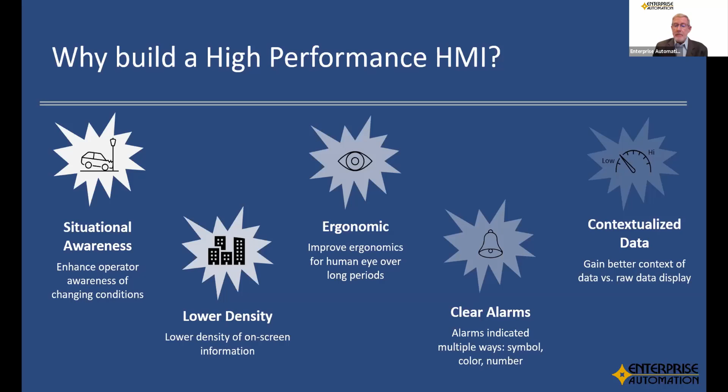So high-performance HMI is the industry answer for a standardized, easy to use, and more productive HMI graphics system. So a properly designed HMI will support very smooth, stable operation of the process, as well as notify an operator of any conditions that may be outside of what would be considered a normal condition.

Design requirements. Early HMIs really were very simple depictions of a P&ID of the process that they were either controlling and monitoring. This was mostly the limitations of the computing and graphics power at the time, but with the enhancements to that, a lot of graphic screens have become quite animated, if you will, and look more like cartoons. But that can be very distracting to an operator, especially in an abnormal or emergency condition.

So the ISA came out with ISA 101, the HMI design standard. This started back in 2003. The International Society of Automation, or ISA, commissioned a working group of end users, operators, engineers, and others to basically get together and lay the groundwork for the standard. And finally, in 2015, 12 years later, they published the ISA 101 HMI design standard. It's a set of guidelines, principles, and philosophies for developing graphics on a process HMI.

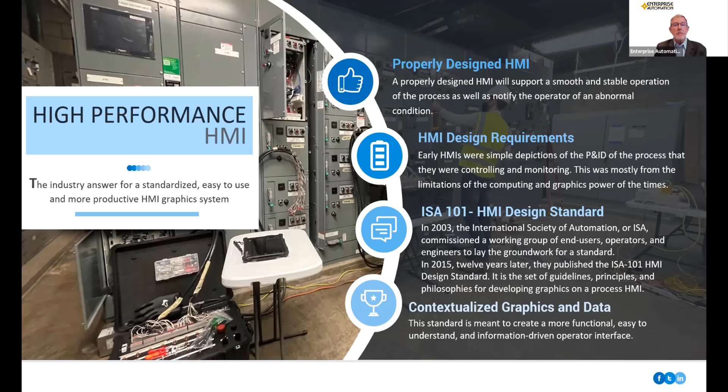So what are some of the key considerations that you need to consider when doing a high-performance HMI? Number one, proper use of color. So moving away from the intense and colorful graphics, the high-performance HMI is developed in grayscale, with color really intended to be more of an attention getter. Gone are the days of red and green to indicate whether it's running or not, on or off. In a grayscale screen, the use of color is meant to indicate an abnormal situation very quickly.

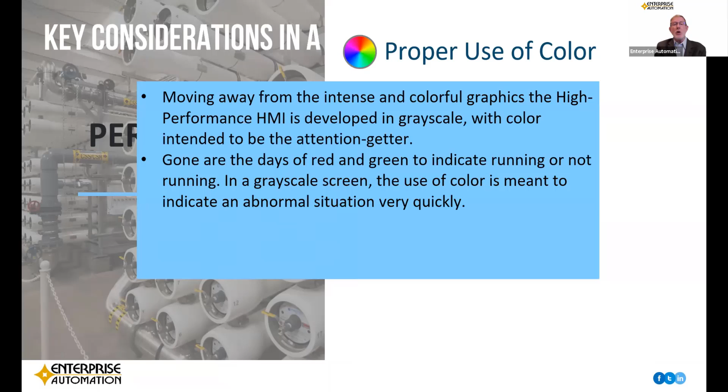Now, it has been shown that the new use of color alone has resulted in approximately 48% improvement in detecting abnormal situations before alarms occur.

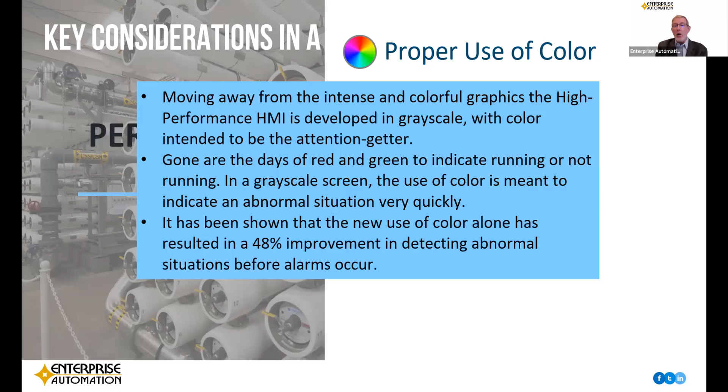Second thing to consider is, as I said earlier, information versus data. Many HMIs are going to have dozens or more of data points visible on the screen, but nothing for an operator to determine what the data means. There's no context to it. Are you approaching a high limit? Are you at a low limit? Raw data readouts, again, have little to no context to actual status.

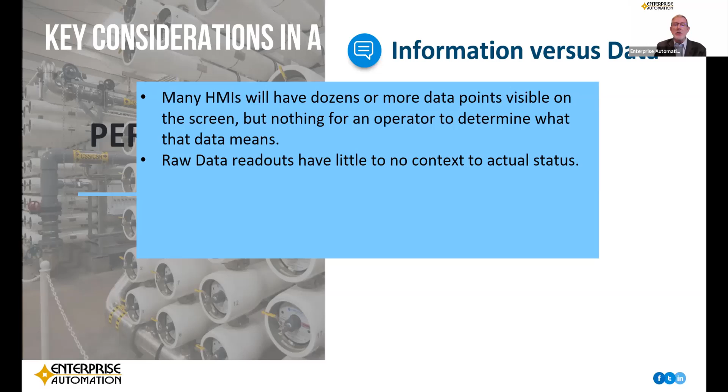By utilizing an indicator of normal range with a process variable, the operator can make a quick decision to take action to correct a situation that is trending away from what would be considered normal.

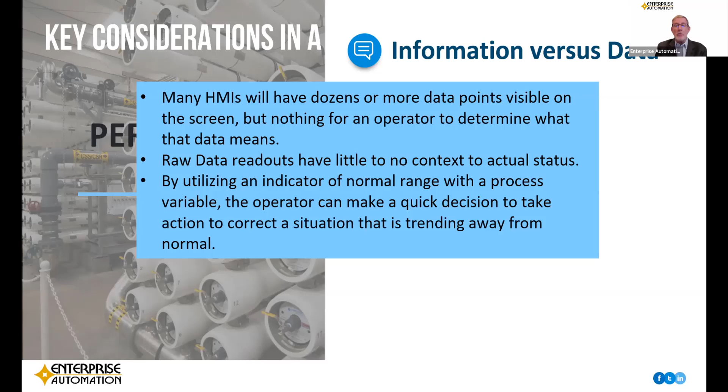Talking about embedded trend displays. Traditionally, the trend display has been a separate screen that you would have to call up to see what has been happening over a set period of time. By embedding them within the graphics of your screens, the operator will be able to see what's actually happening and what has happened while looking at the actual process in operation.

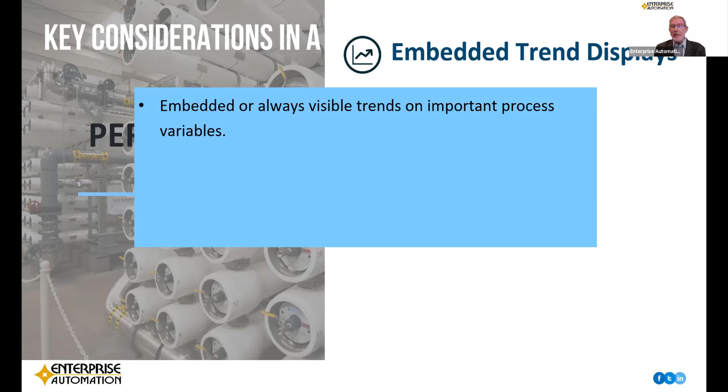So the trends are always visible. The operator's got a quick overview of historical data, can evaluate for any necessary adjustments before a situation can occur. Time-consuming and costly mistakes can now be avoided.

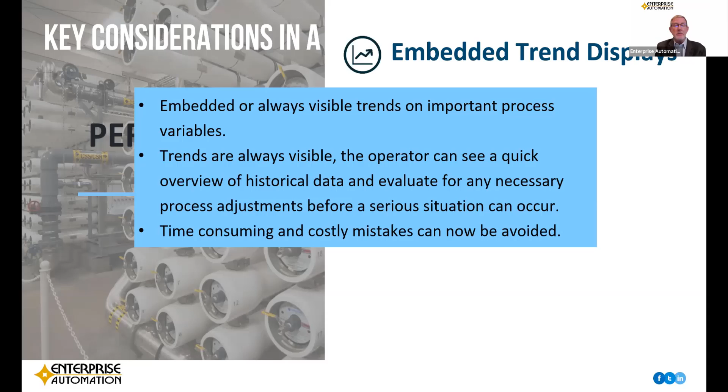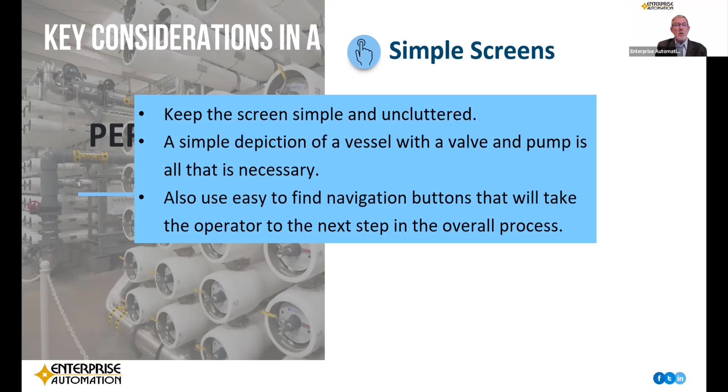Next one is simple screens. Keep it simple. Keep the screen simple and uncluttered. A simple depiction of a vessel with a valve and a pump is all that's necessary. Also use easy to find navigation buttons that will take the operator to the next step in the overall process.

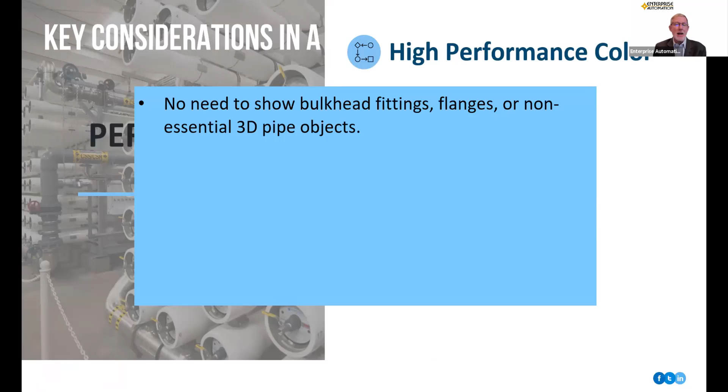And then high performance color. And I'm really not talking about applying color, it's more in the way that the screen is laid out. So there's no need to show bulkhead fittings, flanges, or non-essential 3D piping objects. They just add additional clutter to the screen. Using an ISA valve and pump symbol and using a line to depict process flow are the standard now.

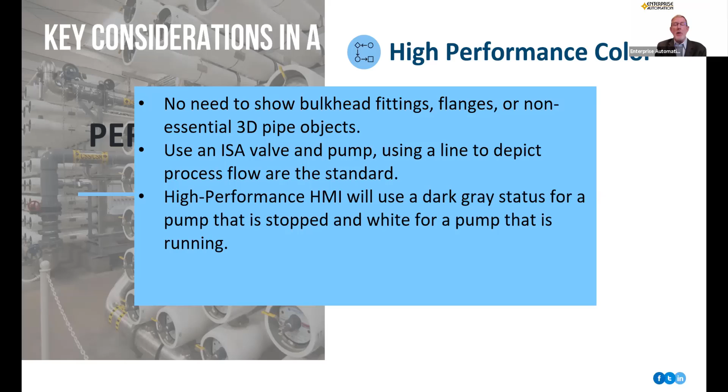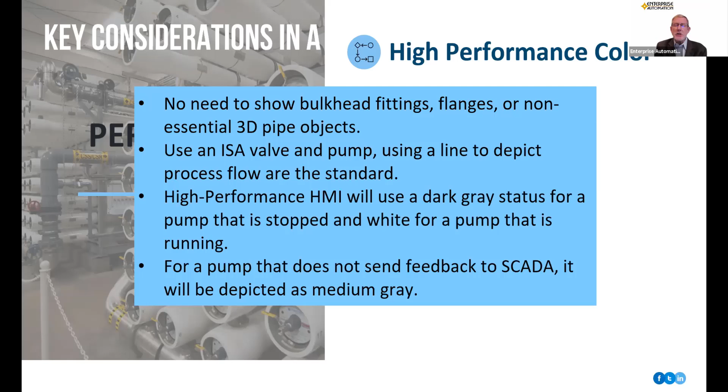High performance HMI will use dark gray status for a pump that is stopped and white for a pump that is running. Again, we're getting away from that red and green indicating running or not running. For a pump that does not send feedback to a SCADA, it will be depicted as medium gray. Now, again, these are just guidelines and suggestions for the standard.

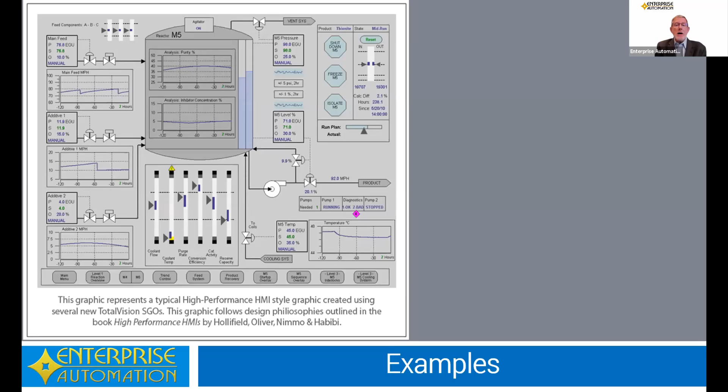So some examples. I have an example screen here utilizing grayscale color as well as data with context to status, indicating whether it's in or out of the standard operating range. Embedded trends within the actual object. As you can see, we've got a vessel here.

In a traditional HMI, the level indicators that are on the right-hand side in blue would occupy the entire vessel. It's not necessary. By embedding that trend in there, you can see historical data as well as the actual current values. And again, keeping simple screens, not the 3D clutter that we've had in the past. And high performance color to indicate an abnormal condition, generally an alarm condition.

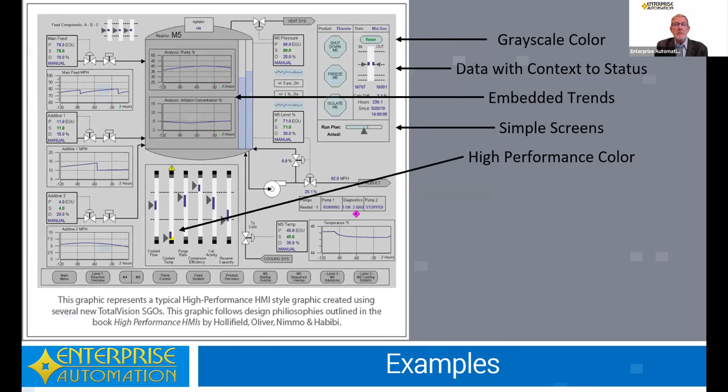So let's talk a little bit about the display hierarchy. Proper display hierarchy is critical to a high performance HMI. So there's 4 levels. Level 1 is the overall situational awareness. It's used for looking at the overall operation of what's happening in your process.

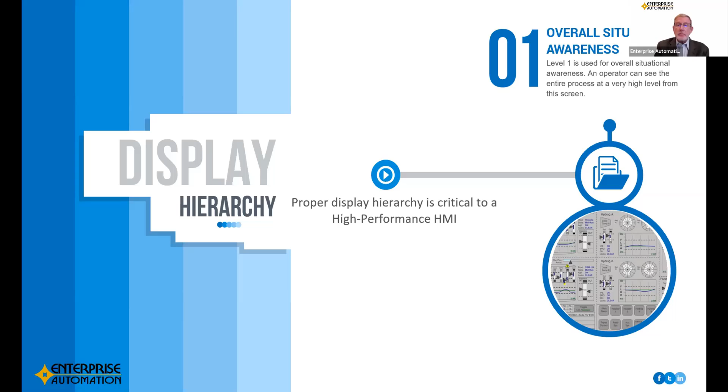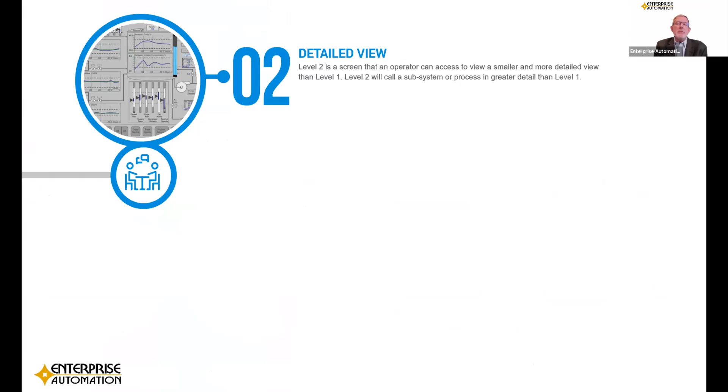Level 2 is the detailed view. It's a screen that the operator can use to access a smaller and more detailed view than the overall level 1. You could call it a subsystem or even a process in greater detail than level 1.

Level 3 is getting into the equipment details, such as a pump or a valve. It can also include more detailed data on that particular process, drilling down into it. And again, as we get into the demo, Kelvin is going to show you that level of detail.

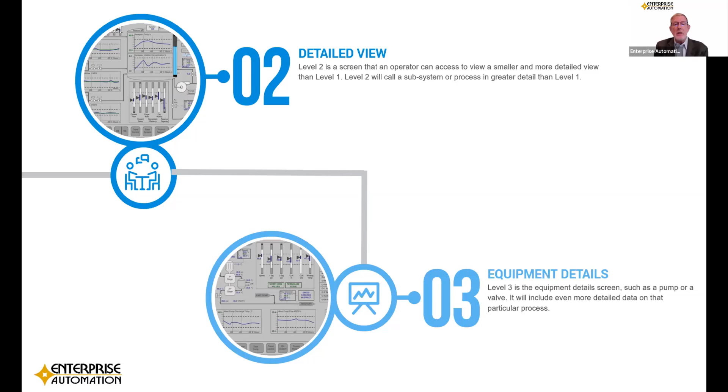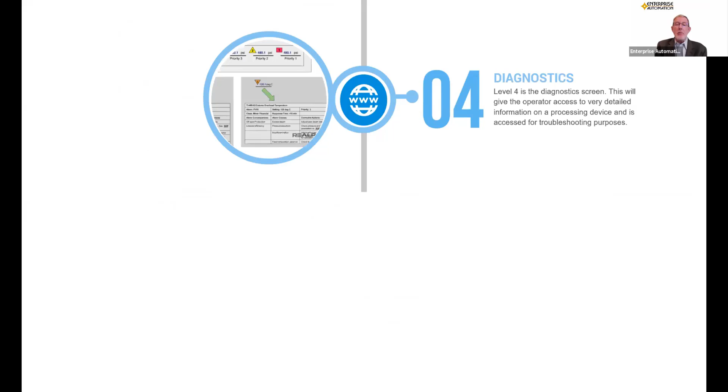And then finally, level 4, which is the diagnostic screen. This gives the operator access to very detailed information on the process and devices for troubleshooting purposes.

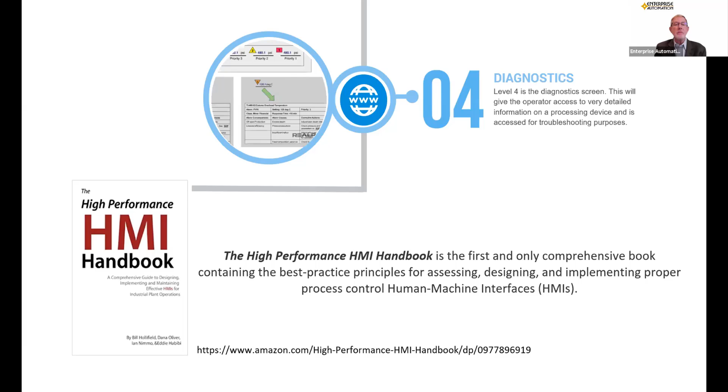Well, that's the end of the boring slides. I will turn it over to Kelvin now to do the demo. And I'm going to stop sharing my screen, Kelvin, and you can take over. Okay.

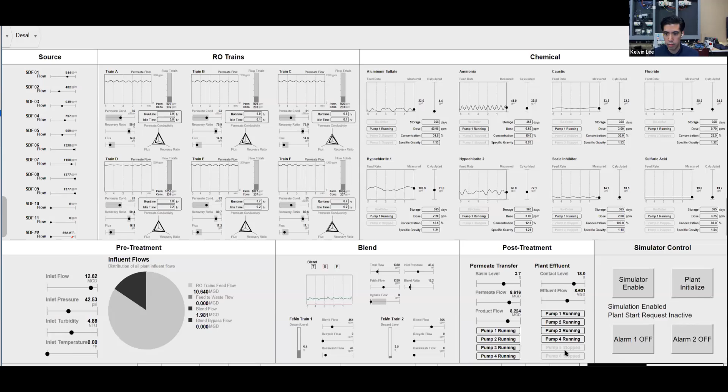So here we have our implementation of a high performance HMI with situational awareness involved. So what we see is basically no color, everything is in grayscale. We have trends for all the relevant information. We basically pick and choose what we want to show and what we don't want to show. The intent is that an operator can just look at this and see only the relevant stuff in an overview.

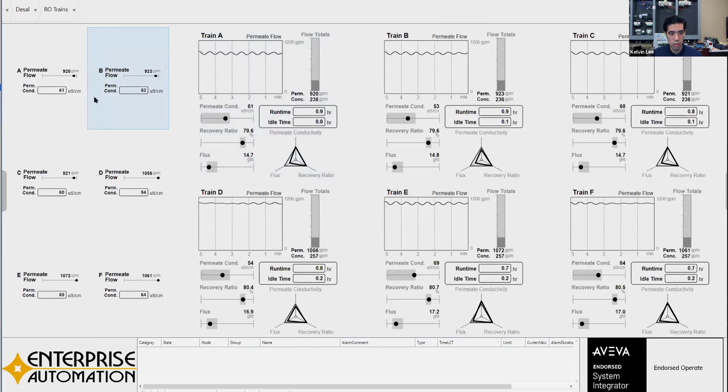Then we have multiple layers that as we drill down, we do get more information. So for the RO trains, for example, we can click into the RO trains area, and then we get just a little bit more information. And then going into each individual train here, we get additional information, a little bit more of a traditional P&ID style layout. So we have just a more traditional look and feel that operators might be used to.

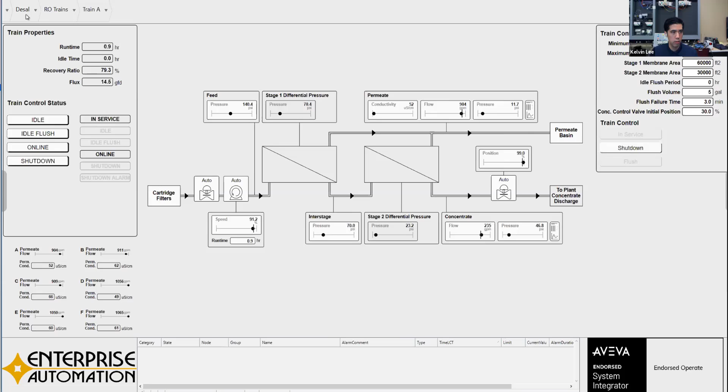But again, we notice that there is basically no color on here. Everything is simple. There is basically no question of what information you're looking for. Something else that we implement here is you can quickly, as an operator, look and see how your system is performing. So without prior knowledge of the process, you can look at the graphs here and see that, okay, I have a gray box and a black indicator.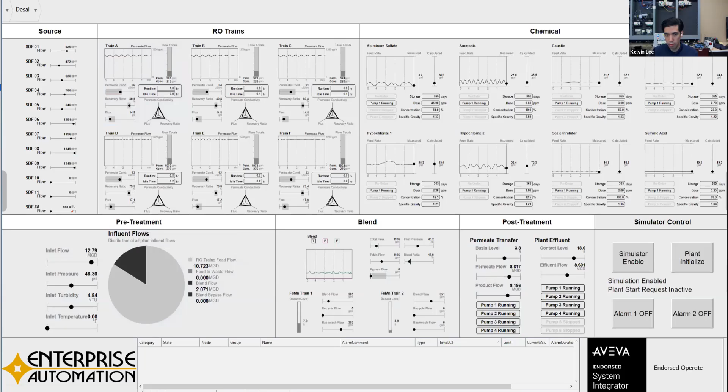So the gray box is my ideal performance area. Basically, you can map it to your set points, so your alarm set points. So if I'm within my alarm set points, that's my ideal operating range. So over here, I'm at 79% recovery ratio. Without prior knowledge of the process, I can see that, yeah, that's actually where I want it to be, because as I zoom in real quick, we see that the black dot is within that gray box, almost in the middle.

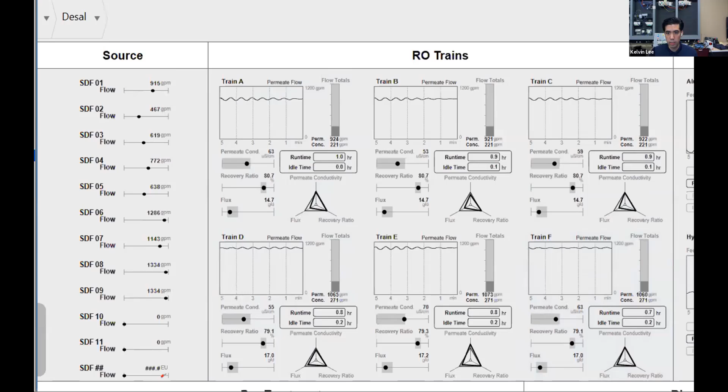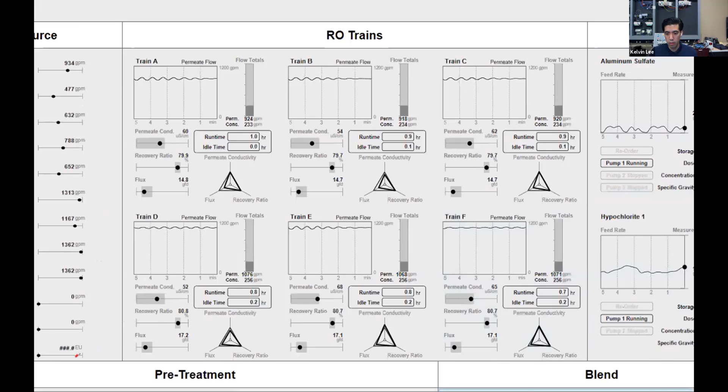Over here, we're kind of getting on the border of maybe getting too low, but again, I'm within the range. Traditionally, if you just have an analog readout, you would have to go into an alarm page or know the process to see if this number 14.6 is good. You have no context behind it. What we try to do here is basically just look at this and then see very quickly how everything is performing without too much involvement, too much training required.

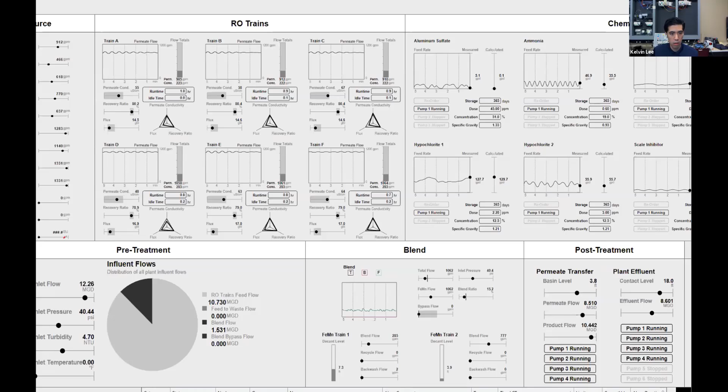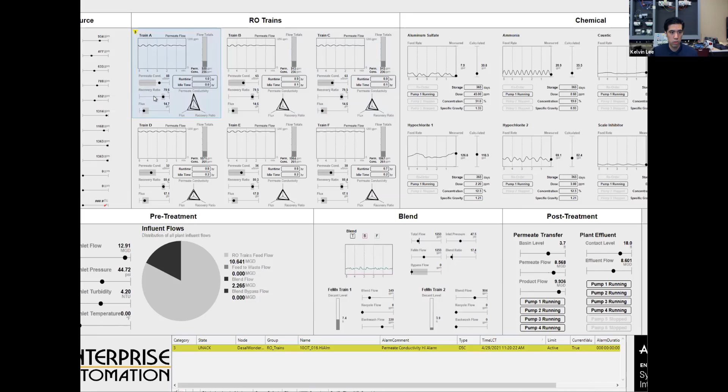The next thing we want to demo is going to be the alarms. So if I trigger an alarm, we can very quickly see where the alarm is going to be coming from. Okay, so if I expand the window a little bit, we'll see the alarm banner at the bottom. I have a permeate conductivity high alarm. And right away, because colors mean something here, I see that there's a yellow box around train A. I can click train A, go into it, and I'll see a yellow box around permeate conductivity.

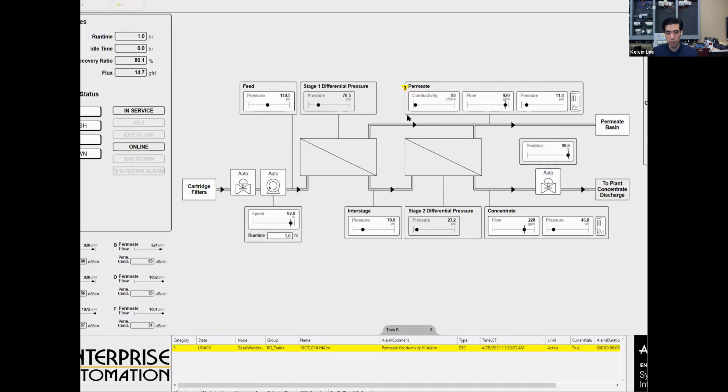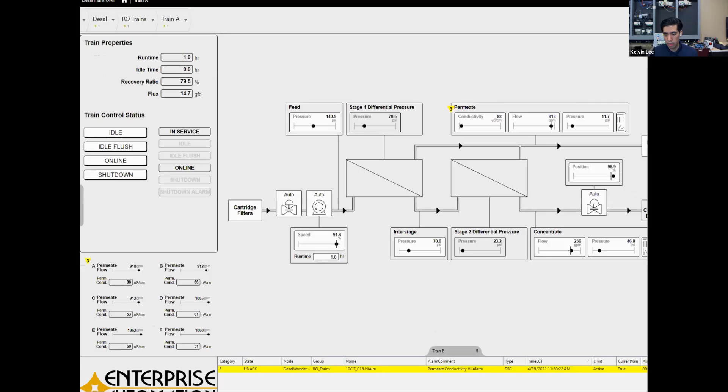So from a distance, you're not distracted by any other colors. You're not distracted by any other information. Everything that's pertinent is laid out easily visible. So, okay, I have a problem here. I can address it. I can do whatever I need. And it follows through here as well. In a system like OMI, there's multiple panes that you can navigate through everything.

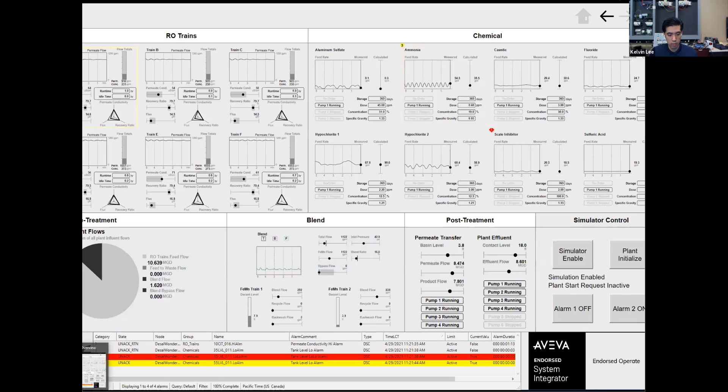And that's useful when we go into another type of alarm. So another alarm demo I have here is this one, which now we'll see two different styles. So two different priorities. So we have a higher priority, priority 1, and it's in red. Again, it very quickly draws your attention to this section right here.

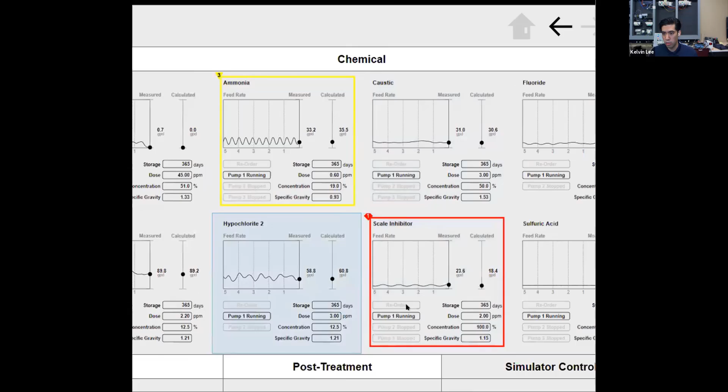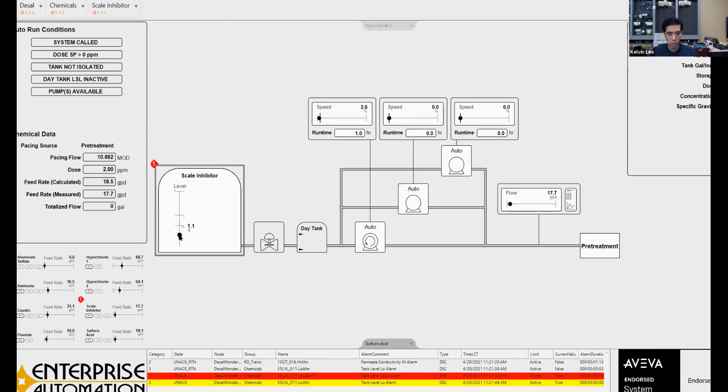So I see two different alarms. I, as an operator, can say, okay, I'm gonna go to the higher priority one because that's what draws my attention most. It's the bright red one. I come here and then I look on the big screen. I see that, all right, it has to do with this tank. And here are my set point levels, and I am below the low here. So I have an issue that I want to address and try to figure that out.

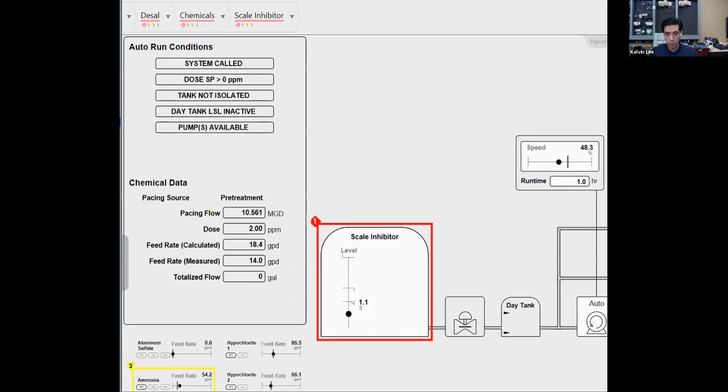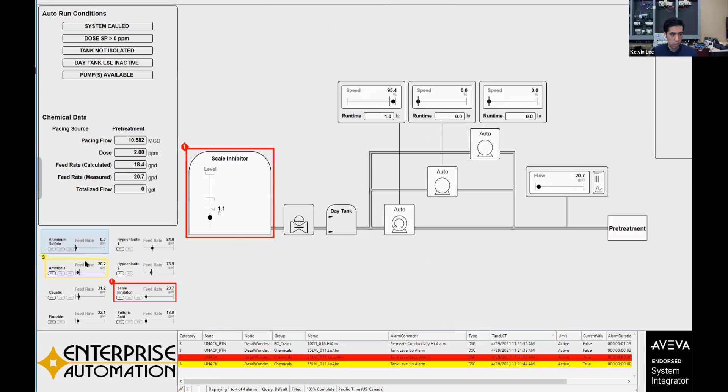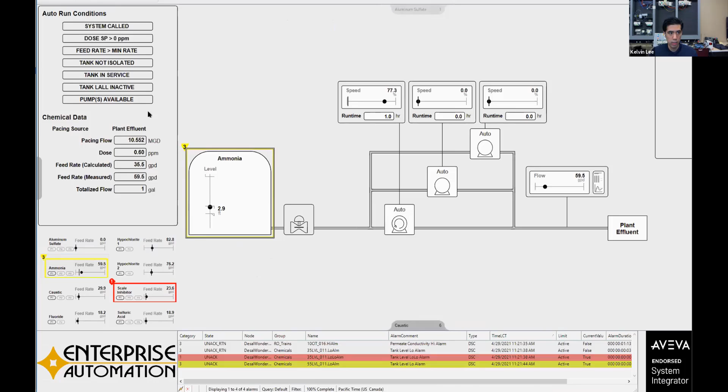But at the same time, I do have multiple alarms going on. And in the OMI program, the way we have it set up is we have the main screen, but we always have an overview screen here that links the area. So I see there is multiple issues going on with this area. And I can quickly go navigate because these two came up at the same time. So I'm assuming that they are related. So I'm just going to go and click this one. And I'll see that, okay, well, this one just happens to be the level being low here as well. Address it as needed, and then I can just go ahead and clear it out, acknowledge everything.

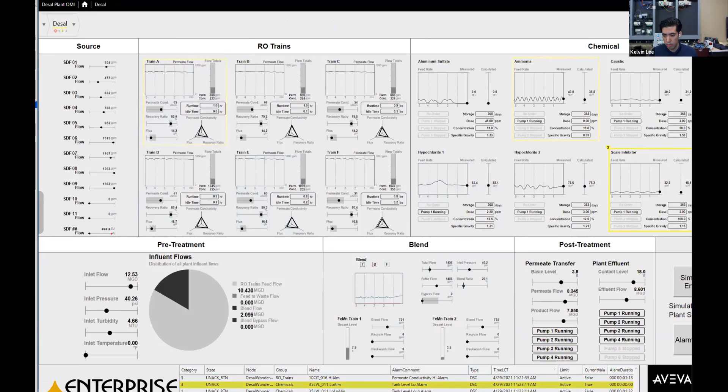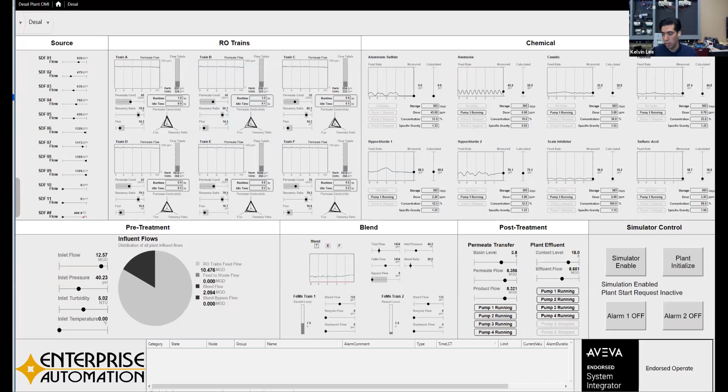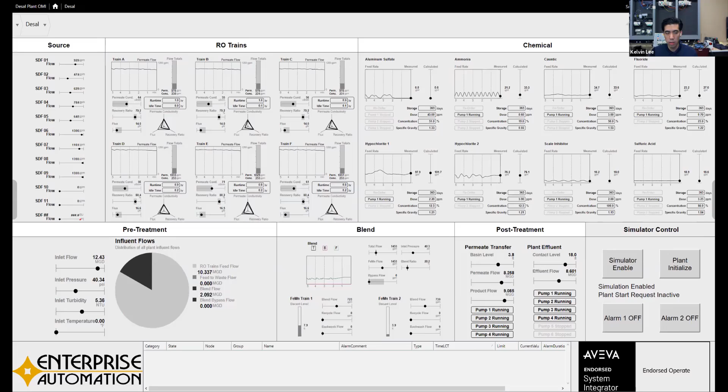And once the alarms are no longer active, I can just acknowledge it. And then I'm back to a nice grayscale. Everything is operating as intended. Nothing's out of the ordinary. And I'm happy as an operator. Everybody's happy because things are performing optimally. And no distractions. So that's the basics with OMI or with situational awareness HMIs.

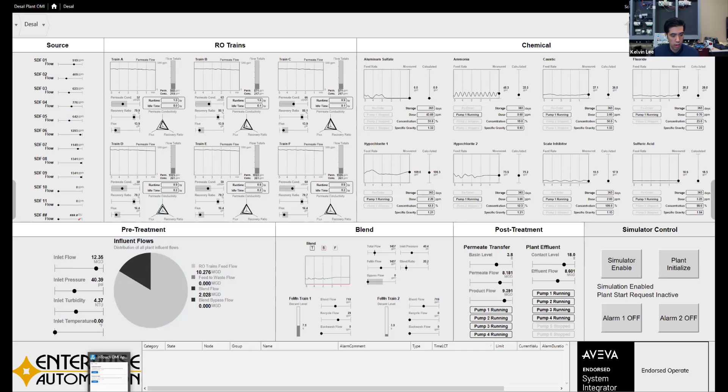But with some of the newer product as well, we also get into added benefits. So OMI natively works really well with situational awareness. It also gives us the ability to create very powerful standards in such a way that we can very quickly add new wells. So for example, we see here that I have 11 wells. Let me go ahead and get rid of that piece right there. So in the PLC program, as it stands, we have 11 wells, SDF 1 through 11.

In the front end, if I was to design everything with very robust standards, which we have here, I can say, all right, in the future, I've added well 12. Typically, that's a big process to have it integrated, but I've created standards here. So now I can just say, all right, I will add a SDF well 12. I've created a well template in our PLC program, and this has given us the ability to lay out everything, including all the I/O for the well. There's analog valves, pumps, pressure sensors, level transducers, and everything else that's associated with the well.

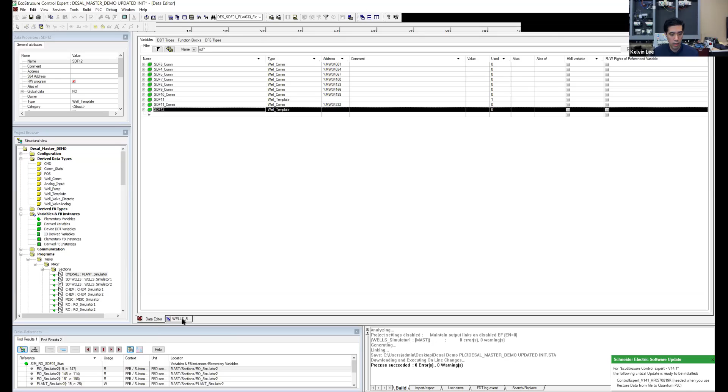So by simply adding SDF 12 on here as part of my standard, I can then come into the well 12 or the well simulator program, which is what we're using here for the demo. I can copy the code for another well. So this is going to be the process code behind it. And then just change this tag to my standard that I've created and program it into the PLC. So this is the backend side. The PLC and the HMI has been programmed in such a way that they're related and it makes expansion very quick and easy. So I'm literally adding an additional well live. So I'm gonna transfer it to the PLC.

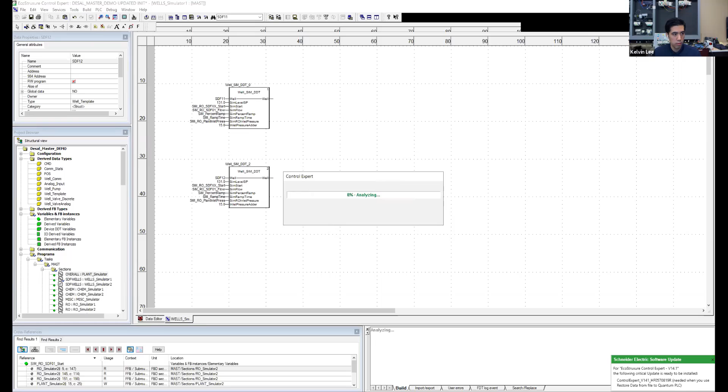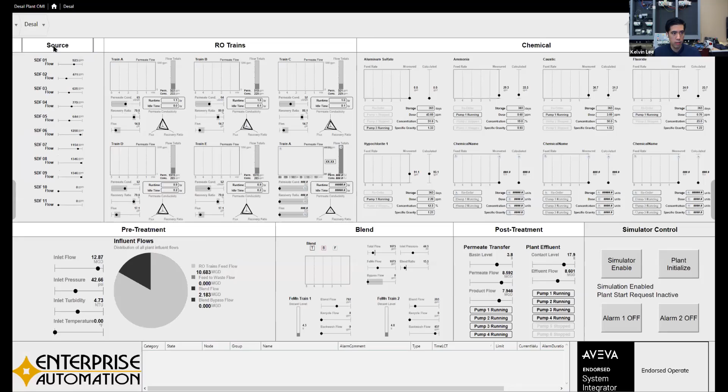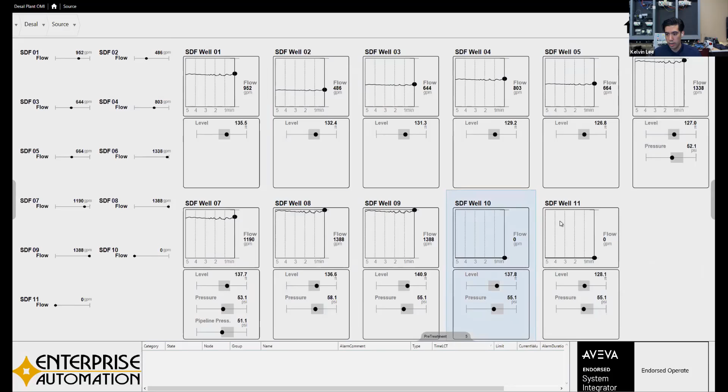And as it's building the PLC program, I'm going to go into Wonderware. And we can see here that in the well overview, we have 11 wells. And it's set up in a way that it can automatically add the 12th well in with very little config. So I'm going to go into my toolbox here, and I have the well, we call it the source. We have a well object. I'm just going to create a new instance of that well object. And as it's doing that in the background, I can go back to the PLC program and let it finish what it needs to do.

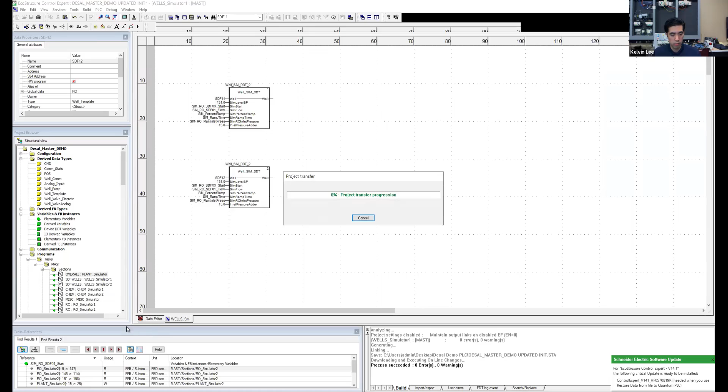So I've stopped the PLC now. And if we come back here just for fun, we can see that there's a lot of broken things, because the PLC has stopped, it's lost communication. So let's check on the status of everything. It's still creating the instance. But again, this is doing everything that would typically take weeks, if not months of programming. So I have the new well here. I'm going to call it SDF 12 again. And right now, what it's doing is it's generating all the tags, generating all the links to the PLC automatically.

So HMI configuration, we didn't need to create tags ourselves. We didn't need to draw anything new. We didn't need to do modifications to the overview. It's doing that all in the background right now with just a few clicks and renaming of objects.

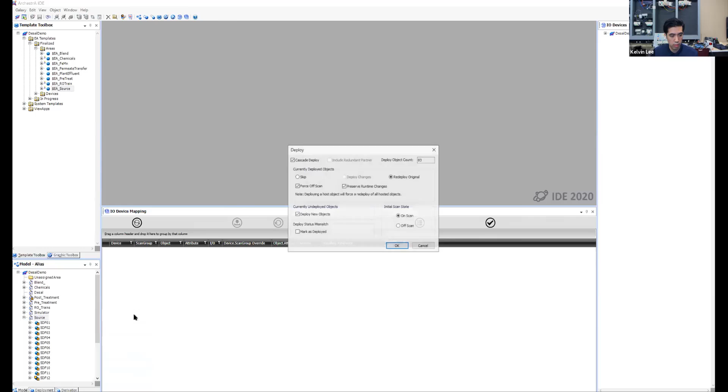So now I have that in an unassigned area. I'm going to assign it to the source. And then I'm just going to deploy it. Over here, I'm going to run the new build since I've added well 12. And go back to the HMI, and the PLC has started up.

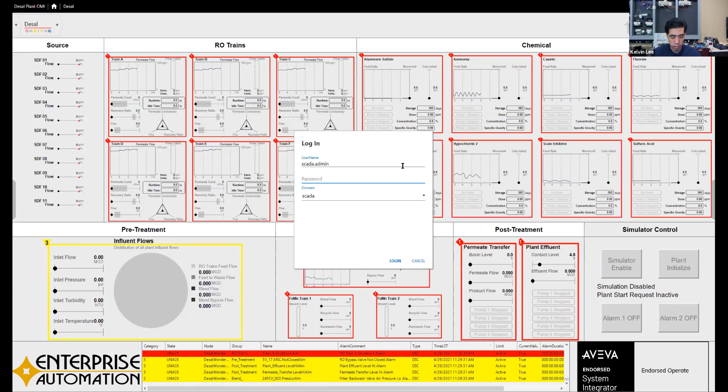We'll see a whole bunch of alarms everywhere because the plant is in a shutdown state. So for situational awareness, we see that there are definitely problems based on color. Gonna log in. And I'm just gonna start the simulator so we can get rid of all the fake alarms right now.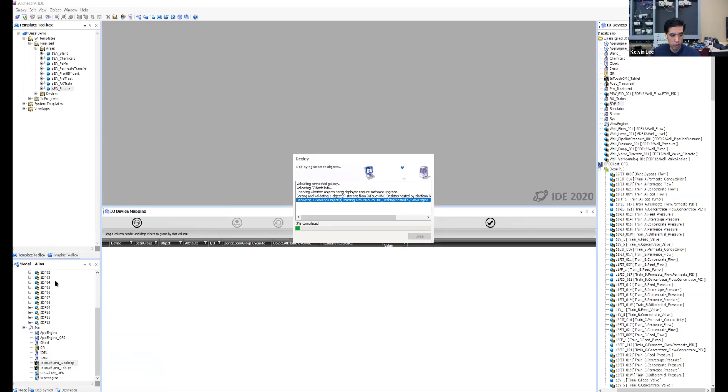And the well has been deployed. I need to map the communications device for the new well. So that's all of this equipment here. Right. While I'm doing that, I'm going to deploy the objects on the screen as well. So again, because I've put it here, the screen is automatically populated.

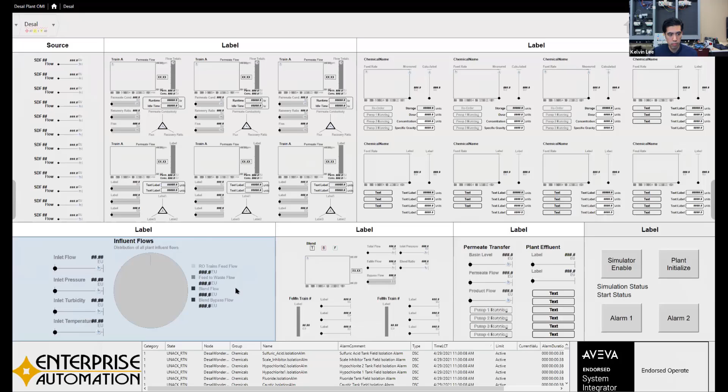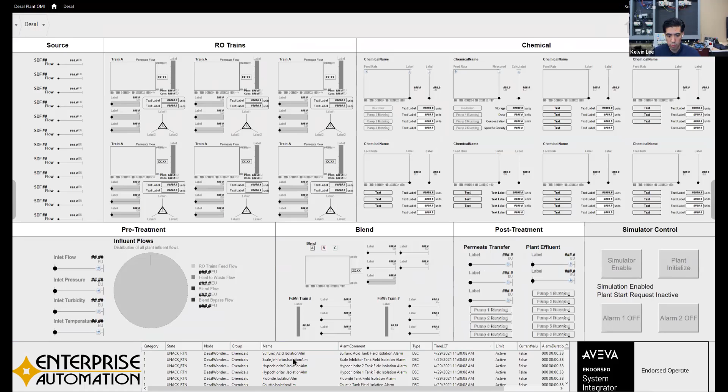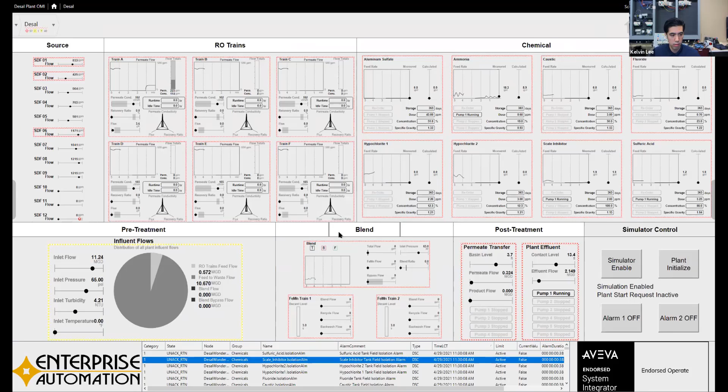And it has noticed that there's an update to the screen. And now within minutes, let's go ahead and acknowledge all the alarms. But within minutes, we have SDF12 here. We have it here as well. And we have all the graphics associated with it generated almost automatically with just a little bit of configuration in the back end.

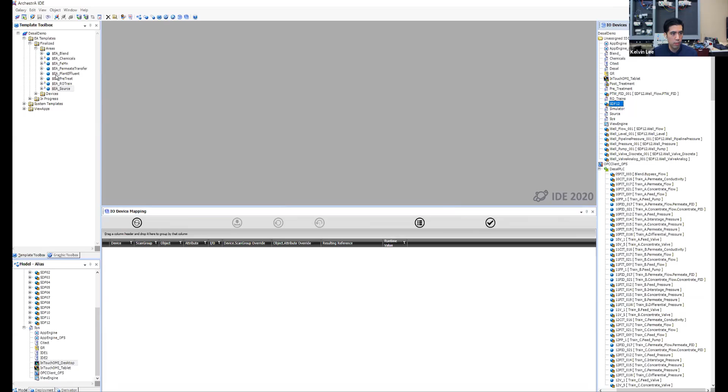The communication still hasn't gone through yet because we need to map devices. And it's just acting up very slightly right now. But it would typically communicate automatically as all the tags have been created based on our templates.

So this is the power of both situational awareness and InTouch OMI, in that as long as you create everything in the front end, plan everything out, you can generate new equipment very quickly. And you can also see all the styles and everything matches.

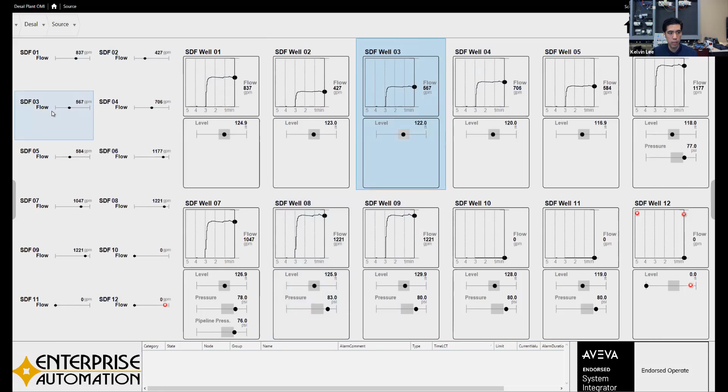We still have overviews and detail level, and everything basically navigates automatically, and all these screens get generated automatically. And everything is simple. The alarms and everything also work the same way. So that's my live demo.

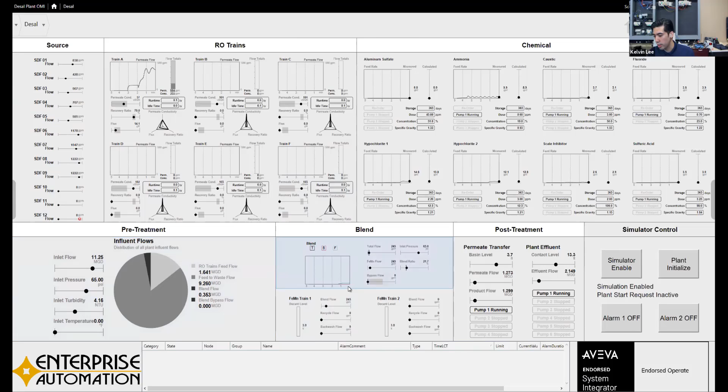Okay. Can you hear me, Kelvin? I can. Okay, good, good.